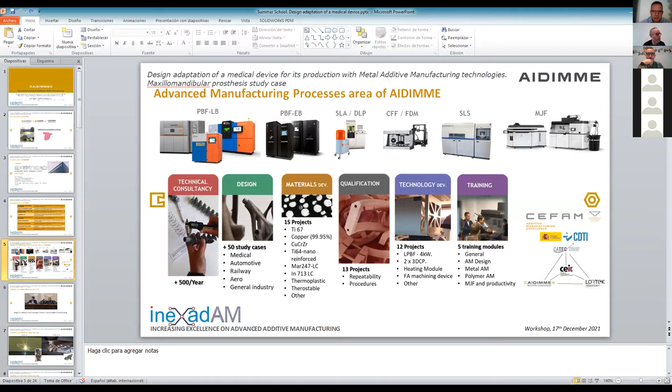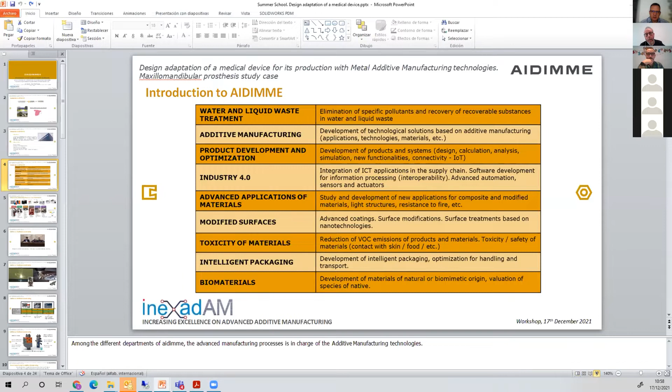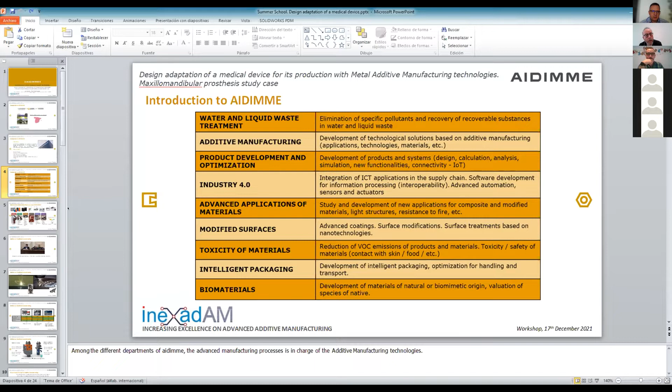Please confirm it's visible. Okay, thank you, Damir, and thank you to all attendees for listening to my presentation. First, let me introduce AIDIMME, the company I'm representing. We're experiencing some technical difficulties with the screen sharing - the presentation isn't in presentation mode, it's in editing mode, and there seem to be issues with having two screens. Let me try to fix this... Maybe share desktop instead of the screen. Okay, I'll try to manually adjust the display settings.

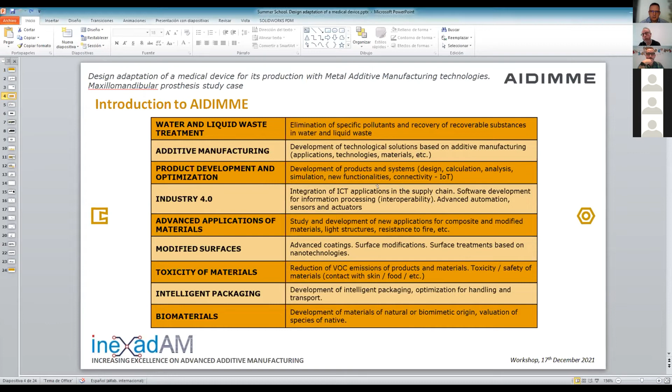Sorry, these are the lines we are working with, as I mentioned before - the technologies we work with at this moment. We're able to process metal materials mainly based on powder bed fusion with laser and electron beam. We also have other technologies for processing polymer materials like SLA, CFF, SLS, and MJF.

We work in different fields around additive manufacturing: providing technical consultancy, design for manufacturing, developing materials, and qualifying materials and processes for specific applications like medical and aerospace, which are quite conservative fields. We're developing technology and providing training to disseminate this knowledge to the companies we work with.

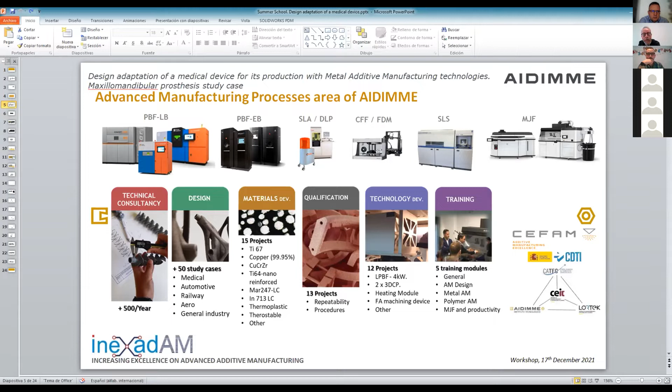At this moment, we are also part of an excellent network about additive manufacturing, specifically metals, here in Spain.

In this presentation, I would like to highlight the importance of design for manufacturing. It's possible to see that the trend topic is: what is the 3D printer more convenient for me? It's a good question, because at this moment there's a wide range of technologies available in the market with different capabilities. But to take advantage of additive manufacturing, if you don't have a proper design for taking advantage of it, it's not possible to profit from all these technologies.

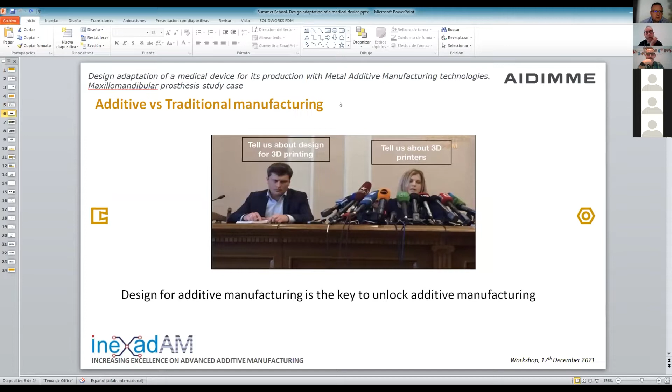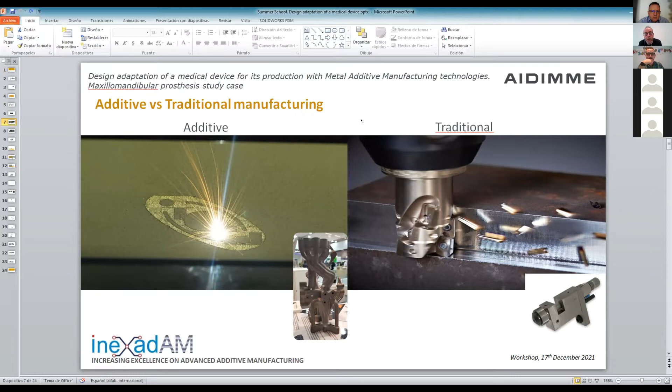On the left, it's possible to see that a person working with design for manufacturing has no so much question for him. As you mentioned before, Jose and Damir, the difference between traditional milling - all the techniques based on removing material to achieve the final geometry - in relation with additive: additive can provide us the possibility to build more complex geometries than removal. In general, we have different methods for producing metal parts, for instance.

Like casting or forming, when a tool is required for achieving the final geometry, material removal, and additive manufacturing.

That's important. You mentioned something before that's quite important. It's not a question of using only additive manufacturing alone or only traditional methods like milling or casting. It's important to combine some of them to take advantage of every technology, because at the end, the final part needs to meet certain technical requirements, and it's not possible to achieve these requirements without combining different manufacturing methods. We will explain later with an example.

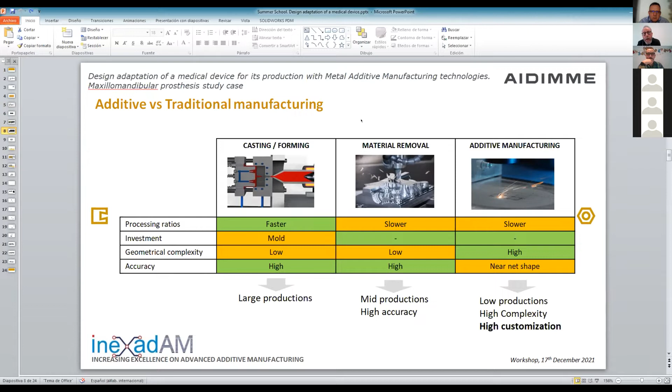Here it's possible to see, in terms of design for manufacturing, this is an industrial application, but I think it's a good example to check the importance of design for manufacturing. On the left side of this figure, you can see an assembly of different components to build the product. In that case, these components are produced by machining.

So when designing, thinking about this manufacturing process, you must take into account what is the best option or design for reducing milling times and tool hours, and at the end, reduce the operations. Increasing the mass means an increase in material of the part, so we are talking about high volume geometry, because the fewer operations, the cheaper the result.

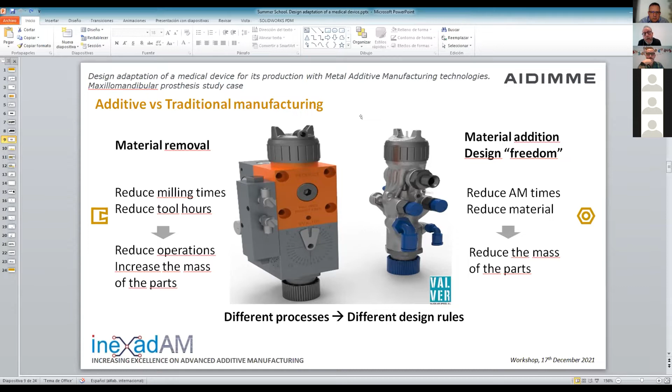But in the case of additive manufacturing, the design approach is quite different. This technology allows freedom of design, but it's important to bear in mind that here the question is to reduce the amount of material. Less material means a cheaper process, because it consumes less material and also less time to produce the geometry. So at the end, we are using less volume of geometry, which means less material. It's quite different processes, meaning different design rules. It's a very important message to consider.

And of course, additive manufacturing is not a magic solution where everything can be manufactured. It's important to know that it's an alternative process that complements other traditional processes like machining. So it's important to consider in which geometries, parts, or products it makes sense to use additive manufacturing.

It's a question of thinking about what target you want to achieve: for instance, to reduce the weight of the part, to reduce the production lead time, to have more process flexibility in order to reduce the time for any design change required, or to reduce stock or cost, to improve the added value of the parts by adding new features or customization. It's important to consider all these questions in order to design properly for additive manufacturing.

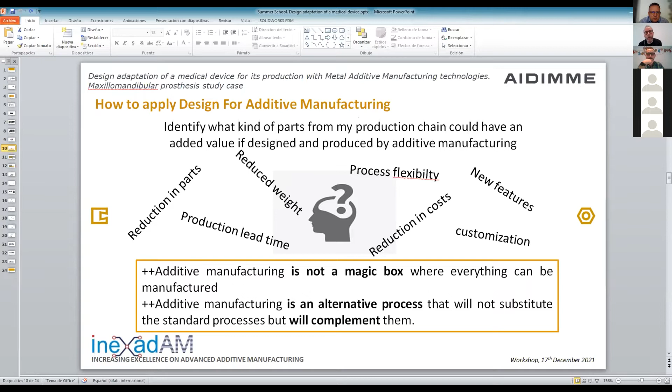That requires a good understanding of the benefits and limitations of additive manufacturing technologies. Every technology has some limitations, for instance, regarding the material, dimensional specifications, roughness, mechanical properties, and so on.

It's also required to have a solid understanding of the part requirements and the environment. At the end, based on these requirements and limitations, the question is to choose the best additive manufacturing technology and specific material for the application.

And again, it's important to consider the whole supply chain for obtaining this part. That means it's not only a question of additive manufacturing by itself, but in combination with other processes for achieving the final part.

And based on that, we can establish the cost assessment. Someone asked before about the cost comparison between a part produced with additive manufacturing versus the traditional method. At the end, it depends, because if you consider all the processes for obtaining the final part, you get a final estimation of the total cost.

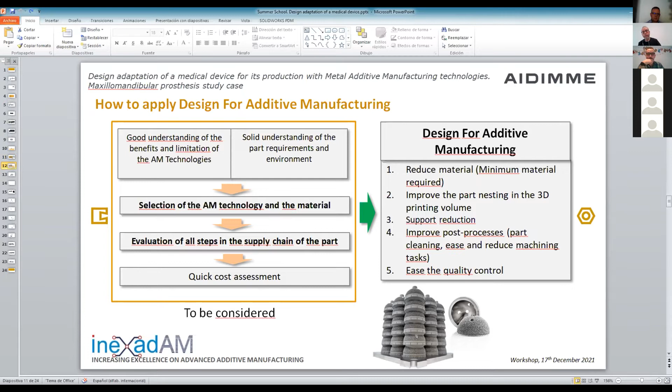An important thing is that when considering design for manufacturing, we can split this into different concepts. We talk about design for function, which requires knowledge of anatomical requirements when dealing with medical applications, but also knowledge of the manufacturing process and all the post-processes needed in the supply chain to obtain the final part. So it's important to configure a cooperation team with different skills and backgrounds and expertise, in order to really reach the goal of a good design for additive manufacturing.

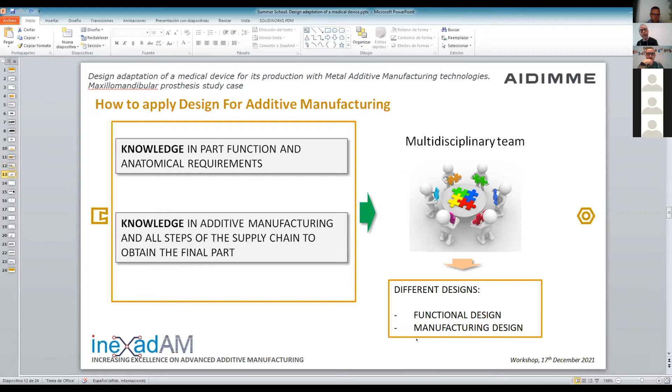I would like to introduce this case, a successful example of cooperation between different partners with different skills and backgrounds. We obtained here a medical device, a maxillomandibular prosthesis, a custom implant. In fact, this implant was patented by the three partners who cooperated.

Incliva is a hospital, a research foundation related to a hospital here in Valencia. A surgeon cooperated in the development of this product, the chief of the maxillofacial department in the Hospital Clínico of Valencia. Another partner is the Biomechanical Research Center here in Valencia, along with ourselves.

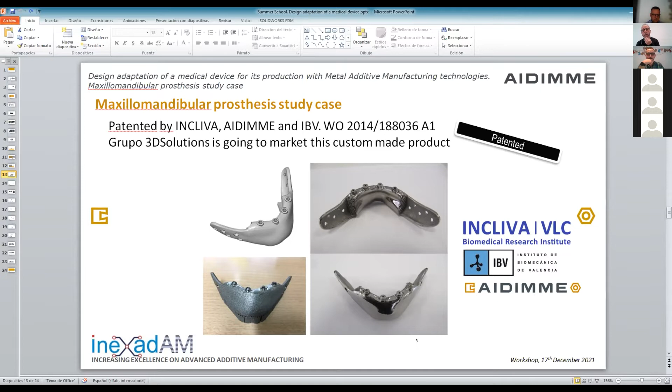Here it's possible to see it's part of the jaw of a patient. This is the description of the patent, so we can distinguish in this design, for instance number 4, a solid part that is machine polished because it's in contact with the soft tissues in this area of the jaw. Here, in part 1, is how we fix this implant to the bone through the holes referenced as number 2.

There is also a lattice structure, number 3, whose function is to facilitate the integration of the bone, the osseointegration, in order to finally fix the implant to the bone. It's not possible to see here, but we also have the preparation for implementing dental implants into this geometry afterward, if required after surgery.

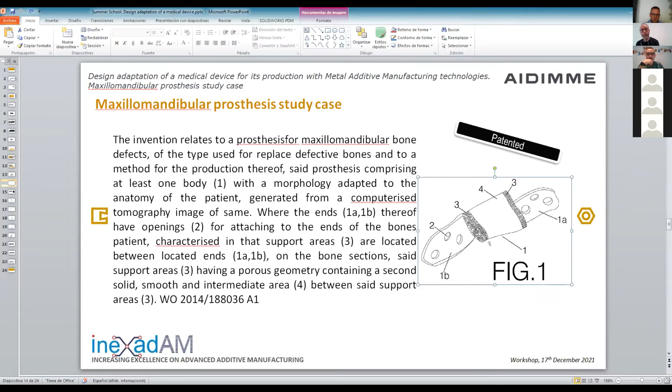What is the process for obtaining this part? The first step is a CT scan of the patient, to design with the help of the surgeon what is the needed geometry for this specific patient and case. There is a first 3D model calculated with a finite element analysis model as well, in order to check all the forces that are technical requirements of this design.

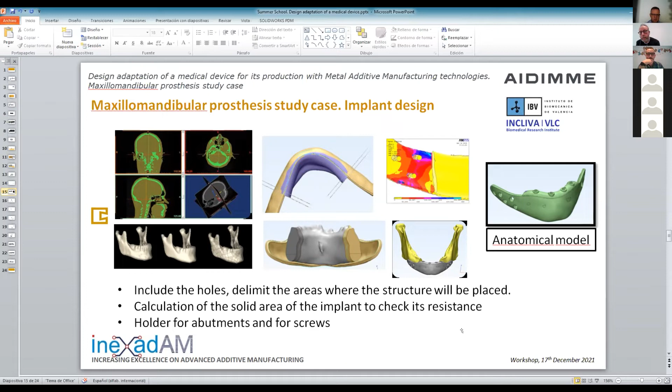After that, we consider the use of electron beam melting, or powder bed fusion electron beam, with titanium 6-4 ELI, for producing this part.

In terms of designing for manufacturing, with the first version of the 3D model, we split this into different parts, different 3D files, one with the solid geometry and the other with the porosity areas, because they require different treatments in the digital version.

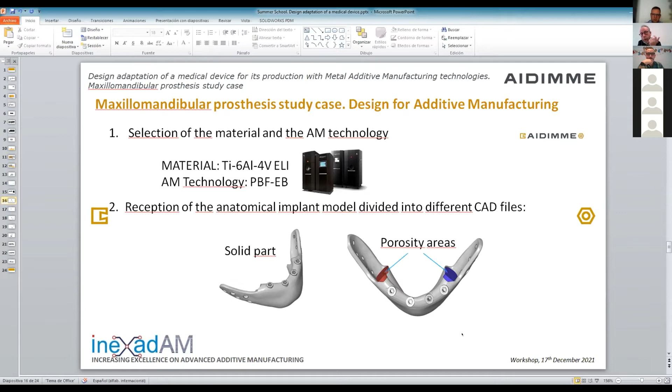Another important question is that since some areas in contact with soft tissues require very good roughness, machining and polishing, it's important to evaluate where extra material is needed for machining afterward in those critical areas. Also, for instance, to drill the holes, because the accuracy we can obtain with additive manufacturing in those specific areas required for a screw is not as good as with a machining process.

So again, it's important to take advantage of the different processes for obtaining. Here, we need first to produce a near net shape geometry with additive manufacturing, and after that to mill the soft surfaces and also to drill the holes that are required.

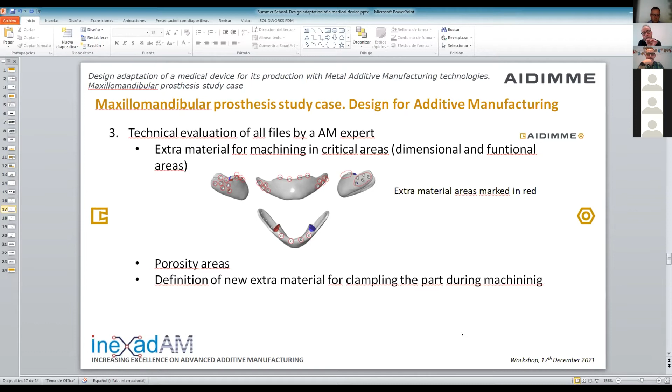With additive manufacturing, we are able to produce the porosity areas and the lattice structure, and it's important to include some features in the geometry for clamping the part during the machining.

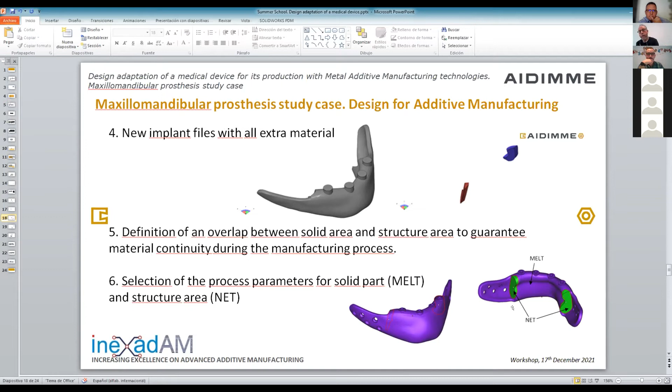Also, it's important to consider, in order to have continuity in the geometry, an overlap between the porosity areas and the solid material, because the process parameters for producing these two different areas in additive manufacturing—the purple and the green one—are different. So it's required to split the geometry into two different models, because they have different process parameters for producing these parts.

It's important as well, thinking about design for manufacturing, to put the right orientation of the lattice structure and the geometry to properly produce it, in order to reduce support structures and these kinds of facts. So with this, we oriented the geometry on the build platform to reduce support structures, and this is part of design for manufacturing as well.

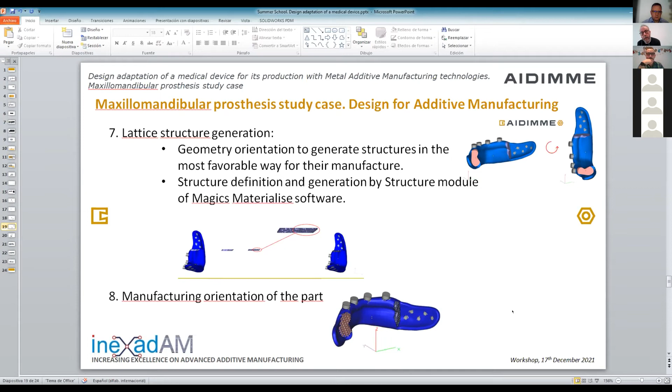Here it's possible to see another version of the 3D file, where we are adding extra material for clamping, like these buttons. This allows us to put it in the machining system, and also to maintain the reference between the additive manufacturing system and the machining system.

Here it's possible to see the support structures we need in order to prevent dissemination of heat transfer between the melt pool and the machine. This geometry is sacrificial, so after production we remove these supports because they are not part of the final geometry, but we need them during the process to transfer heat and prevent distortions of the material when producing with this technology.

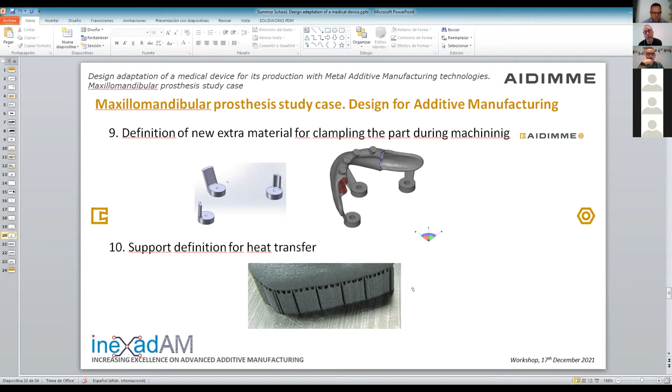Here it's possible to see the build platform. In that case, we are producing 4 samples, 4 items, mainly for demo purposes.

Here it's possible to see that the roughness after production is not so good. It depends—it's good in some cases for tissue integration because there are some cavities on the upper surface. But for areas that are in contact with soft tissues, a lower level of roughness, a higher surface quality, is required.

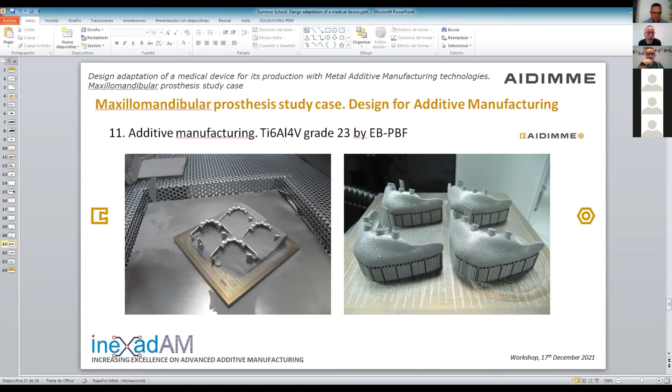In that case, machining is required. Here in these pictures, it's possible to see the operations to remove the extra material we produced for clamping, the removal of the support structures, and the polishing of the areas that are in contact with soft tissues.

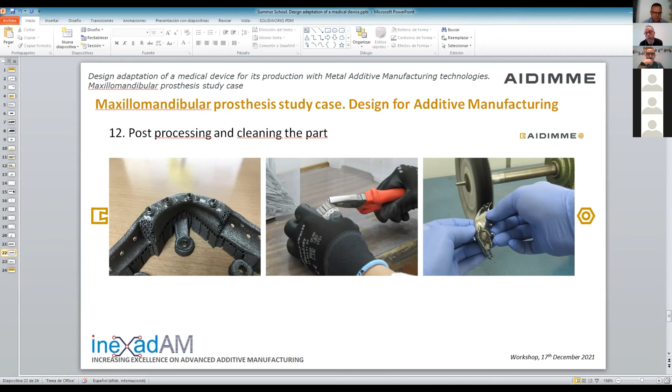Here is the final part, with everything—the polished areas included. In this case, it's not required to polish because it's in contact with bone.

So the roughness is the typical one we can obtain with these technologies. Here it's possible to see the holes drilled with a machining process, in order to have the accuracy needed for adjusting or fitting the screws.

Here also it's possible to see these features designed to receive dental implants, in case that's necessary for the patient. So we cover the complete function of the jaw, in this case for a patient who, due to cancer, has a lack of bone. In the end, we improve the life of this patient.

I think that's all from my side. As a conclusion or summary, I'd like to highlight that it's a trend topic to talk about different additive manufacturing technologies, but it's a must to think about design for manufacturing. It's not possible to have a successful case study without a good design properly suited for the material and the technology, and this requires knowledge very specific to the manufacturing processes.